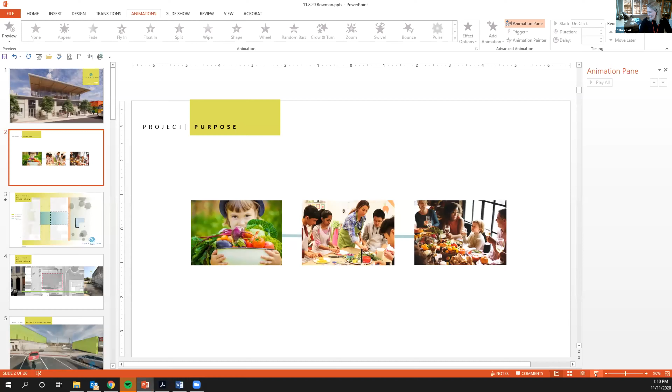Are you going to share your screen? Oh, I thought I was. That would be good, wouldn't it? Yeah, that would be good. Happens to the best of us. Can you see my screen now? Yeah, and if you could put it full screen, that would be good. There you go.

So I'll just start back at the screen. For my design, I wanted to create a space that not only had a large functioning teaching kitchen, but also a farm to table relationship, as well as a connection to family and community. Having a seat at the table - this is what we want for every child, to see themselves in a snapshot of home, love, and family centered around a table for them.

Taking a look at the existing site plan, we have our service circulation consisting of Missouri Street, which happens to be Alma's main arterial road. Next, our service circulation on Ohio Street acting as the alleyway, and pedestrian traffic from Missouri Street to the city pool and park. Cutting off that foot traffic would really be a detriment to Alma's downtown, so keeping a level of permeability between the three has always been important early on in the design process.

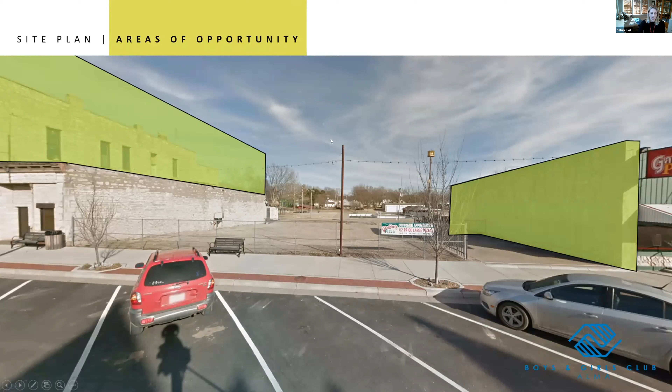Here's a visual connection between the alleyway and the adjoining pizzeria. During our site visit, I noticed some areas of opportunity. Thinking about the building's existing views, I chose to engage the nearby post office building's roof to provide views to the windows above, and then also to the Boys and Girls Club, also wanting to enhance that presence of the pizzeria wall.

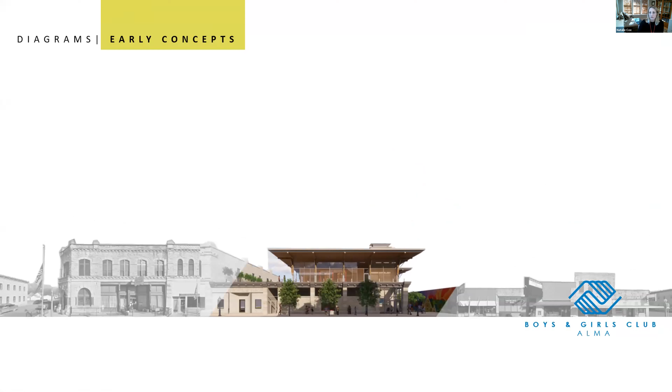Known as the city of native stone, I knew I needed to use limestone and stay within the historical context of the current building facades, considering Alma's downtown is a historical district registered with the Kansas Historical Society. A common theme were these beautiful, ornate, large metal and stone cornices, and I knew I wanted to implement that by taking that original profile and simplifying it into its most simplistic form.

So ideas of public versus private started to emerge, where the building could read like an Italian palazzo block, with public activity on the street level and more private activity on the higher stories. What started to emerge were these shifting planes that kind of pull away from each other.

Here's a look at the proposed site plan. As you can see, my building footprint occupies a vast majority of the available square feet up to the lot line. You can see how I engaged that nearby post office building with an outdoor patio.

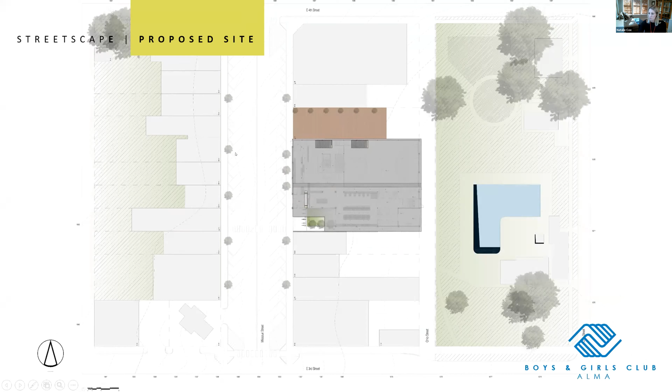Here's a diagram illustrating the connection to the park. There's a 7-foot grade change from Missouri Street to Ohio Street, which is connected by an ADA ramp.

By using the pizzeria wall, I was able to incorporate a community mural that acts as a mediator between the park, downtown, and the Boys and Girls Club.

Here is just a rendering of that street shot, and you can see that visual connection to the park and how the building opens up to the community.

The basic geometry of the building is this cornered entry, essentially repeated again on the second floor with a 10-foot setback.

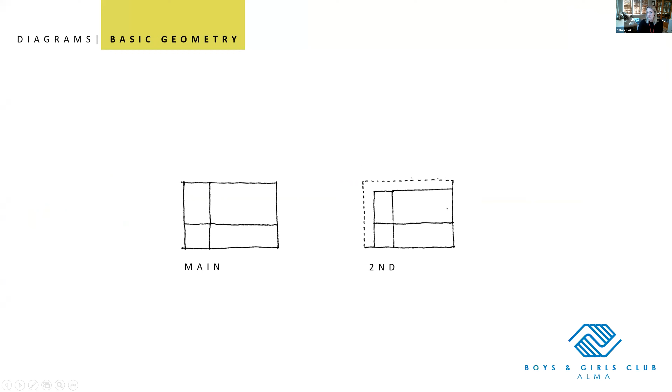My 5 systems are: structure, laid out in a grid pattern; territories, where red indicates administration, orange is the teaching kitchen and service, blue is the 6th through 12th grade members, and yellow is dedicated to our younger members K through 5th. Next we have circulation, which shows the main pathways leading to the exits of the building and carry you through those different territories.

Climate, a daylighting diagram that indicates where the most intense sunlight will be present in the building. Therefore, means of shade control and glazing were carefully planned.

Lastly, combining all 4 systems together to create enclosure, where the degrees of public versus semi-public start to reveal themselves. So on the main floor plan, upon entering, you're greeted by a secured reception area that allows you in.

Where children can hang up their personal belongings, and then a series of steps and seats that are incorporated into a ramp that lead you down to the recreational area, where you get your first glance of the dining room.

The dining room is centered at the most dynamic corner of the building. I chose to create the dining room as a double height space so that the chatter and the laughter and all the wonderful smells that the children make could carry up to the 2nd floor and invite people down.

And also the main interior circulation paths could lead you right to the dining area.

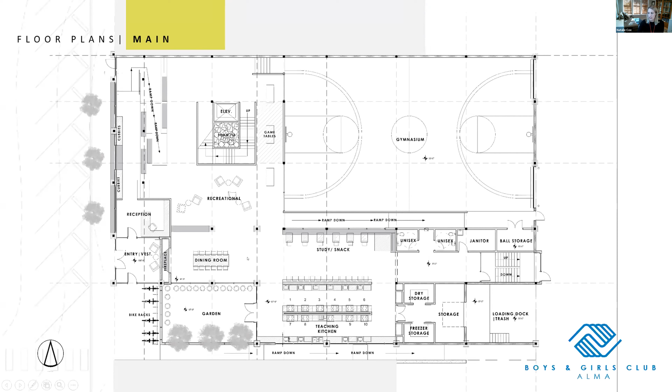Taking a look at the elevation change, the lowest elevation is a 7-foot grade change shown here. Next, we move up to a 4-foot increase, and lastly, a 3-foot increase back up to street level.

It was important for me to keep the garden, the kitchen, and the dining room all on one level so that gardening, cooking, learning, and bonding could happen without pause.

Moving upstairs, to help children with wayfinding I coordinated colors associated with activity. Red represents administration, yellow represents K through 5th grade areas, and blue represents 6th through 12th grade members.

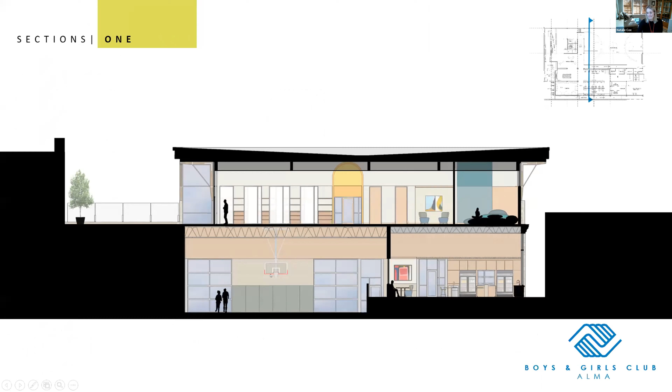Here's a section through the commons area above and the gym below with the kitchen. And here's a rendering of that gymnasium where these two girls are. This would be a pull-out stage on casters for performances.

Next we move to the transverse section, slightly inward into the foam pit, and you'll notice the double height space for the dining room and the fireplace, as well as a section through the open office and the elevator.

Here's a rendering of that dining space and reception. Because choice is important, especially for children who usually don't have that luxury, I made sure to offer different colored seating, which further drives that sense of my chair, my place, my home.

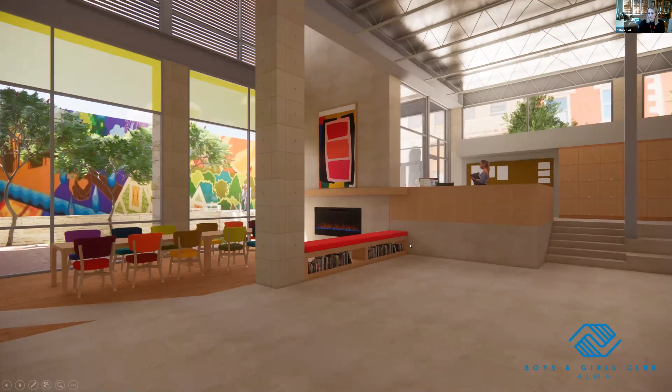Taking a look back in the opposite direction, because the staircase is located in a central location, I wanted to create an experience for the user. Also having that extra 4 feet below, I could use that to my advantage by doing something playful.

For safety precaution, I put a polished aluminum reflective surface on the bottom of the stairs for some of the smaller members if they got stuck and needed help, and it's also fun to look at yourself floating in foam.

And then here's a window seat. It's not only a place to put on your shoes, but also a sensory downtime, as well as views from the outside of the fun within.

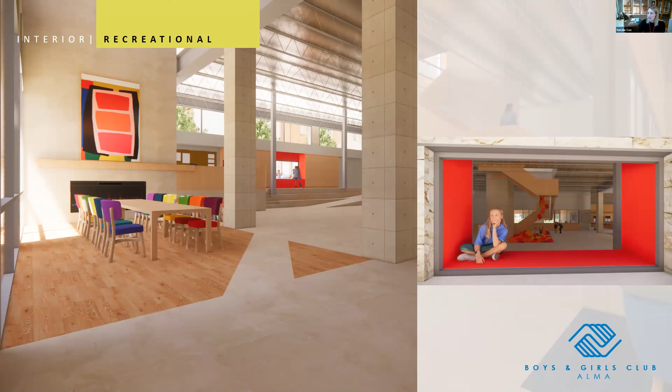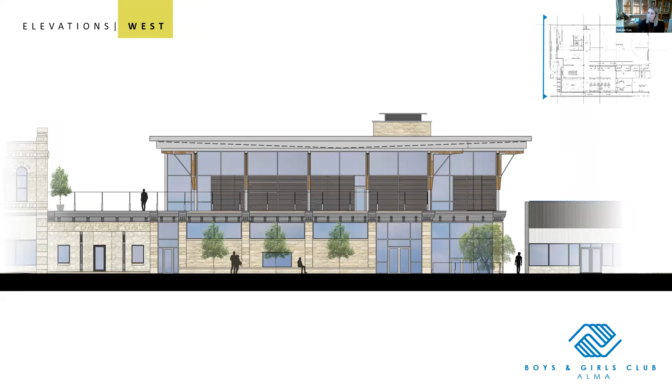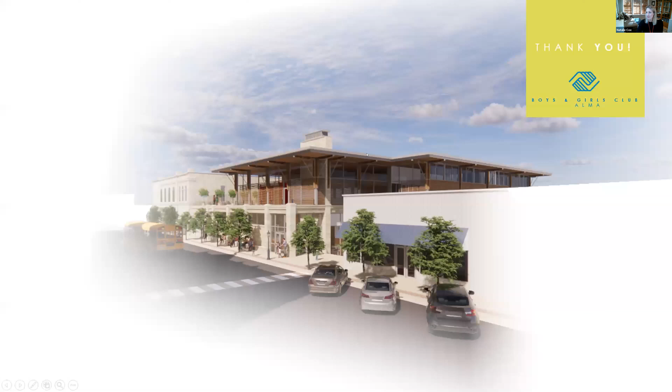Thanks for the presentation. Thank you. Very concise.

Nick, did you have anything to start? Yeah, just overall a few general comments. I was very impressed with the completeness of your project. It seems like everything you need to communicate your ideas and concepts is here. Also, just the way you branded it very successfully, I feel like I'm getting a presentation from an architect actually talking to the client. You've done a nice job having consistency to your aesthetics and graphics throughout the presentation. Great job there as well.

Yeah, I think there's a lot of successful things going on here. I appreciate your sensitivity to the context of the site, tying into limestone buildings on the main street, and then as you pull off the second level, starting to get more of a simplified, almost more contemporary feel to it.

One thing I think you could look at as you move forward with detailing is maybe not get so literal with some of the stone detailing on the first level. I liked your move with how you looked at the traditional cornice along Main Street and then found a way to simplify and modernize it. I think you could do the same thing at the main level and let the stone speak for itself as a material, emphasize that texture.

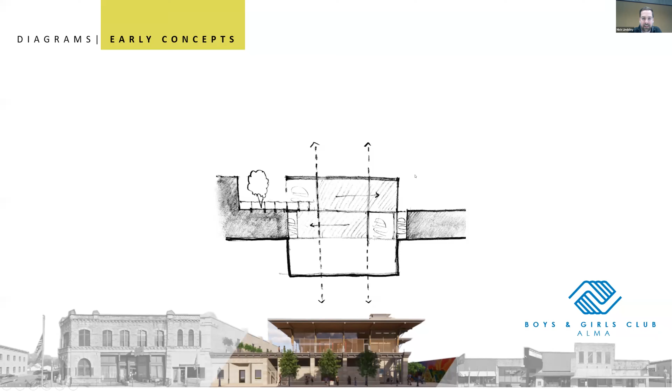I can't remember if you had a diagram of it. One diagram I'd like to see, and maybe you do and I'm just not remembering, is something that explains your approach to materiality and massing, showing that heavy monumental base and then the lacier top, in a very simplified partie diagram. I think that would help before you get into the really detailed images of your outcome.

Okay, yeah, that would have been good to do. But looking at the building, it's a very clear diagram of what you're trying to get at. I think as you tell your story, starting with that very simplified version before you dive in helps pull the listener along, depending on who they are, whether it's your client, a jury, or like this.

Thank you. I didn't put it together like Aaron did, but I was really drawn into the story. Then when we got to the gymnasium, I was a little... So when you're looking at your imagery to tell your story at the end, maybe lay it all out and see where the story or narrative doesn't quite come together. I think the gym looked like it was maybe thrown together a bit toward the end of the project and didn't have as much thought into it as the rest of the project. But overall, very impressive.

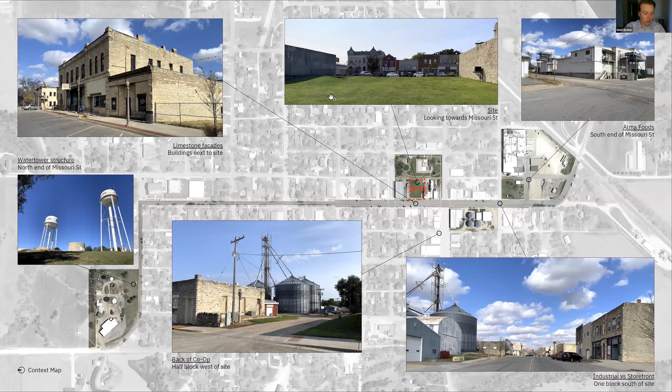Context also plays an important role in this design. The downtown strip of Missouri Street, highlighted in this diagram, primarily consists of retail storefronts with two major industrial buildings at the south end. I found these two buildings, the Alma Co-op and Alma Foods, interesting when juxtaposed to these storefronts.

The storefronts are stereotomic, while the industrial buildings, especially the co-op, are tectonic. The storefronts are human scaled, while the industrial buildings are machine scaled, and the storefronts fit tightly on their sites while the industrial buildings sprawl across and above theirs. The collision of these two volumes from the partie attempts to express this juxtaposition through materiality, structure, and form.

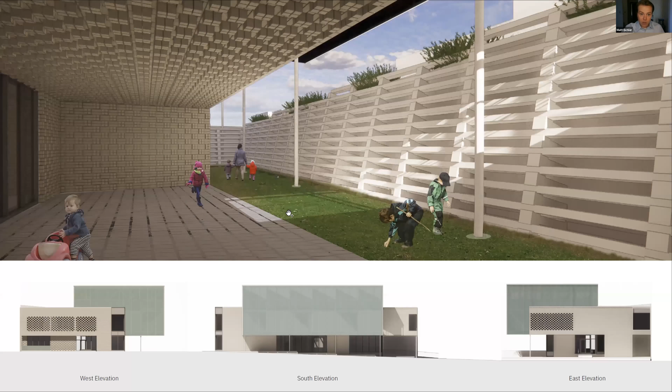So from the exterior brick to the tectonic structural bays of the translucent cube to the retaining wall of the sunken courtyard, modularity runs throughout this project.

There are 3 distinct brick patterns used to illustrate this while also attempting to defamiliarize people with this common material. The protruding header pattern is used whenever mass is taken away from the main stereotomic volume. The screen pattern, on the west and east elevation, is used to bring in some unique dynamic daylight while also distinguishing the entries from the rest of the building. And then a smooth brick pattern is used pretty much everywhere else.

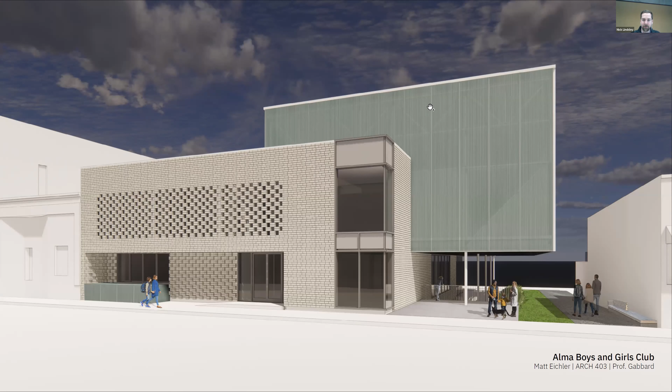Yeah, I agree with Tim. I really liked your contextual study looking at the agricultural industrial buildings versus those Main Street buildings, and how you tied that into the language of your 2 volumes. You described the massing as a colliding of 2 volumes, which I think is a great simple concept for a building. Being able to have that one sentence describe how you organized those 2 different ideas that you opened up with is the perfect way that someone immediately gets and understands what you're talking about, and then they see the building like, yeah, I see those two boxes colliding.

One thing that could make it stronger—I don't know if you have an axon view anywhere—there's a purity at the street level of those two boxes that holds pretty well, though as you go around the building, I wanted to see, and you can see it in plan if you go to your second level floor plan.

This level or the gym? The gym level, sorry.

So on the east side, you lose the purity of that lower level. I think there's some massaging you could do to rein in some of that program so it either aligns with that footprint perimeter of the lower brick buff colored volume, or make it align with the upper volume. Right now it seems like you're trying to fight it to make the space size required work, when I think you could do a little more massaging to clarify that idea all the way around the building, if that makes sense. Yeah, totally.

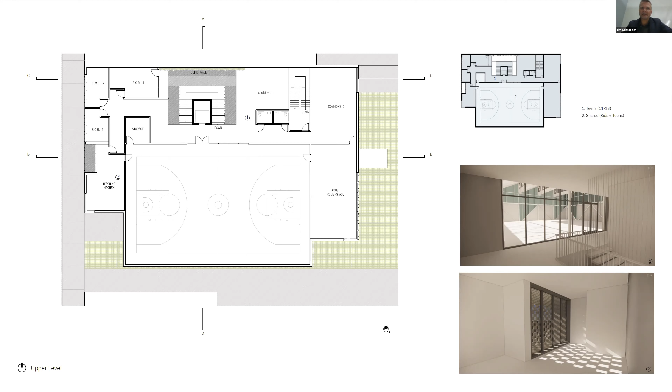Let's see, what else did I have here? I thought the way you organize the spaces to have observation of not only the front door but the back door on that first level, and translated the elevational change, was a really cool way to organize it. I agreed. I wanted to see you pull that reception back so there'd be a clear path all the way through, and the reception didn't get in the way.

Your main section, the one you were talking about where you were looking at the living wall, I think just as you talk about it and try to emphasize certain qualities of your drawings, I would look at trying to emphasize those points on the drawing itself, so we don't have to figure out what the most important parts of the drawings are. Just as simple as giving a green hue to the green wall, so we understand right away this is something special, and understand how this relates to the whole.

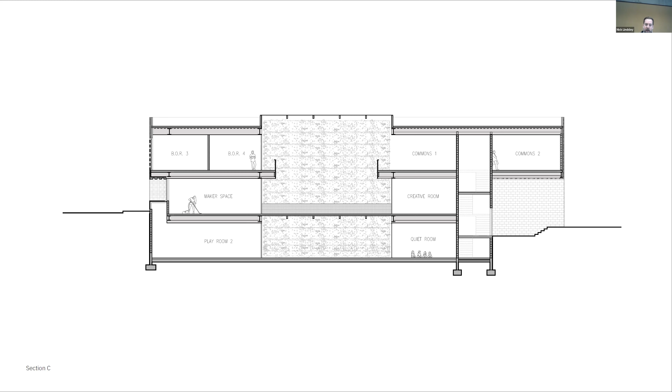The articulation of the brick, I really appreciated. I think you made the right move doing brick instead of limestone, because it feels like a more contemporary abstracted version of that randomness you get from stacked limestone. I'm curious, and maybe it was just because they created the right amount of texture you wanted, but I was curious about the different types of brick detailing you chose. Was there a reason for those specific details or coursing patterns?

Yeah, it started with a Flemish bond, but then I felt like the screen needed more light, so it kind of doubled up everything. And then there was this idea of using a single material in different ways to make kids, for example, curious about something they otherwise feel like they might understand.

Well, don't make them too curious, they'll try to start climbing the facade. When you go around underneath the building, I'm not saying it's impossible, but I question the doability of that detail, basically hanging the brick off the ceiling. That's going to be a pretty tough one to do. It's not impossible, but to get that done well I think is going to cost you more money than you probably want to spend on that detail, when you could put it elsewhere for more public spaces that are going to be experienced by more people.

The structure here, I think, probably is a little skinny, those columns holding up your gym mass. Now maybe most of that load is being taken by the trusses you have up top and pulled back to the main structure on the west side of the block. But I think you're probably going to want a little more beefy structure there, just for the sake of holding the building up.

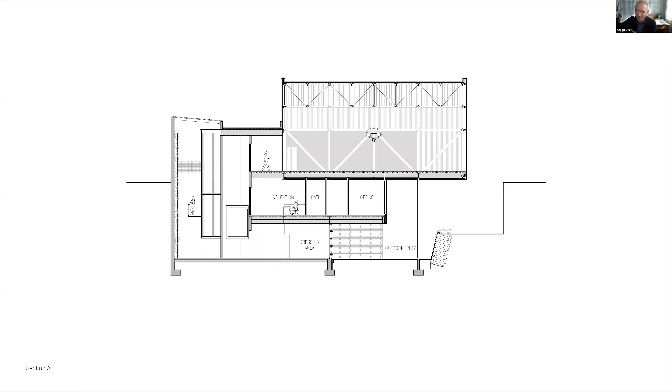I think spatially that's a good choice, to bring light that deep into your building, and trying to make usable space there is the right instinct. Spatially, I thought this move was really strong. And the move you made inside with the main stairway and the green wall behind it, that multi-story high atrium, was a nice spatial move too.

I liked how you hid the sawtooth of the skylights as well. Typically I'd say you want to show those off so people understand what your building's doing as they walk up to it, but it played well to your concept and helped simplify the massing to cover it up the way you did.

Looking at this in section, I was wondering how you were going to make drainage work at the base of each of the sawtooths as you covered them up, because without any sloping from the middle, you're going to have to do some internal drainage in that gym. But that's just a technical thing.

Out of curiosity, what was the thought behind the orientation you faced those sawtooths? They're facing west, so I thought the majority of the time kids at a Boys and Girls Club will be there after school, so it's capturing the light near the end of the day. Also it's the shorter span, so it was either east or west.

Going forward with that mass, I think there's an opportunity here for some night renders to show that. This thing is going to be a glowing box, a beacon for the downtown. I think that'd be an important image to show as you move this toward your portfolio.

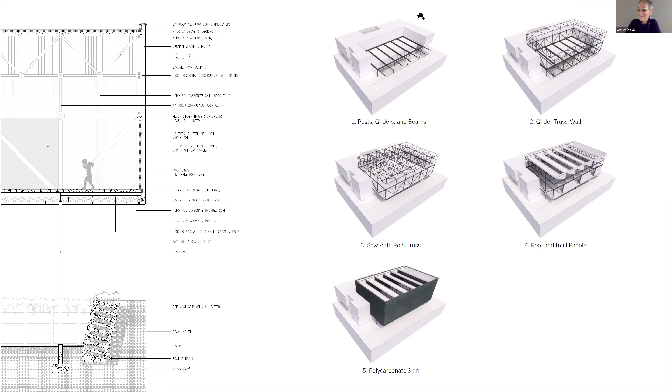Jo Beth, are you ready? Yes. All right.

Good afternoon, I am Jo Beth Hancock, representing Professor Jonathan Dessi-Olive's studio, and this is my proposal for the Boys and Girls Club of Alma, Kansas. The design process began with consideration for the site and its position in downtown Alma. The site plan shows the downtown and Main Street areas to the west, and a community park and pool to the east, where the Boys and Girls Club in the middle must provide a link between the two distinct areas.

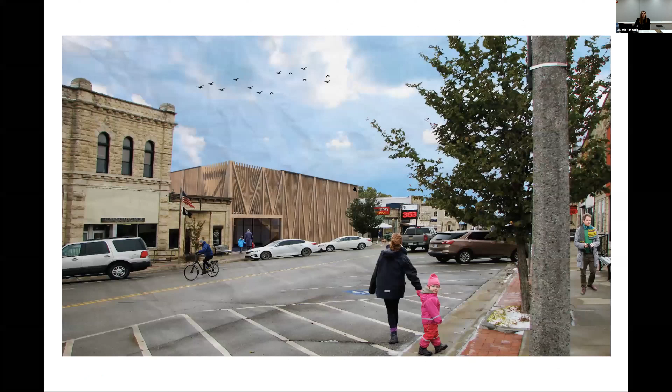A series of low-rise stone buildings lined the downtown street, and it was important to create a building that would mesh with the existing atmosphere while contributing something new and innovative. The west facade bridges the gap between the surrounding buildings by continuing the existing plane through a series of fins reminiscent of the swaying grasses of the Flint Hills, shifting upwards at the north end to indicate an entry.

The main floor of the club is divided into three main programmatic blocks: an area for children, an area for teens, and a shared gym space. A portion of the children's bar is carved back to create a recessed entry with space for bike racks.

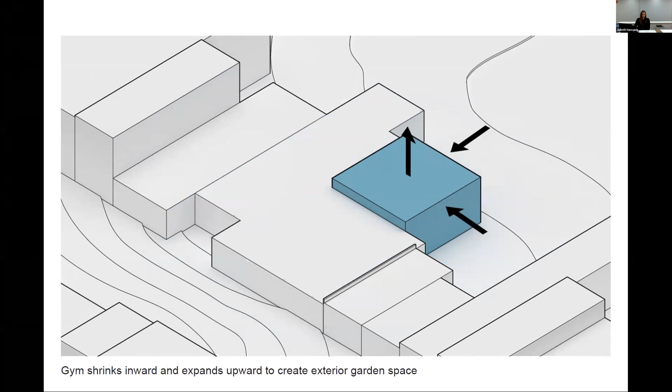On the east side of the building, the gym block expands upward and shrinks away from the edges of the site to allow for an exterior garden and play space. This area provides a secluded place for kids to study and play while maintaining strong connections to the club's interior and to the park across the street.

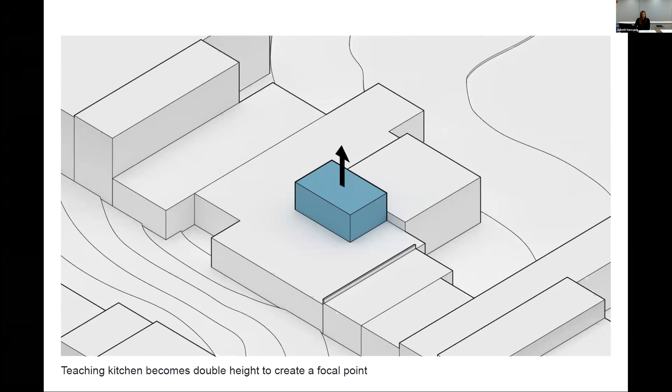Near the center of the building, the teaching kitchen expands to double height and becomes an important focal point in the building. The kitchen was a required element of the program, though I wanted to expand on it to create an environment with learning experiences centered around food.

Seen in the center here, the kitchen becomes a space where not only can children and teens learn about cooking and making healthy choices, but they can learn through the care of the garden outside and by using food as a means of exploring science, technology, engineering, and math.

Younger kids can participate in food-related crafts and simpler experiments such as making s'mores in a box with aluminum foil, while teens can engage in more difficult experiments like generating electricity with potatoes or creating soda rockets.

In plan, the kitchen has a direct connection to the teen lab and experiment space, as well as to the gym, with a more indirect connection to the children's bar on the north, always allowing food to remain a part of the experience at the Boys and Girls Club.

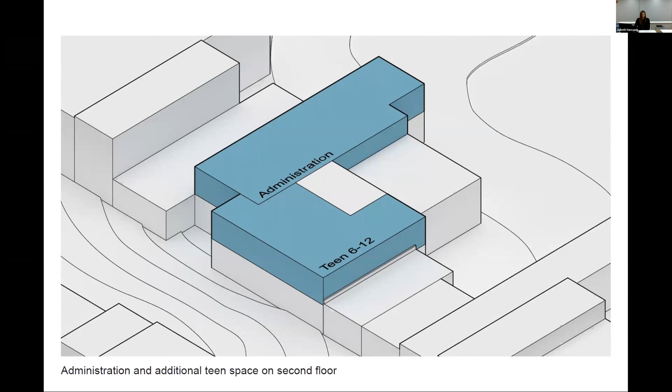On the second floor, there is additional teen space with an administrative wing above the children's spaces. A main staircase and elevator are located here near the entry with fire stairs in the corners of the building.

In plan, a teen lounge space with individual study rooms and the administrative office bar on the north create the second floor, all with views back to the kitchen in the center below.

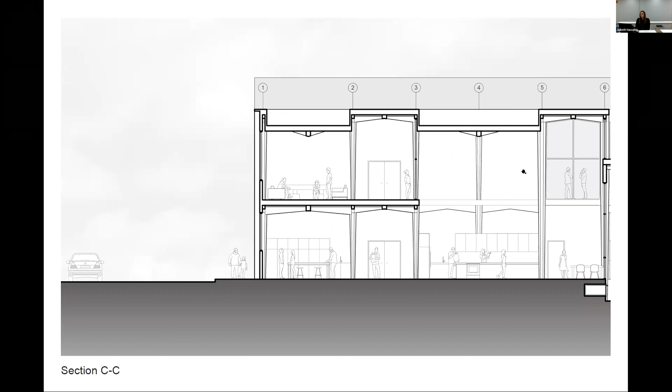Again in section, the kitchen is directly connected to the lab space here, as well as the teen lounge on the second floor where teens can overlook the kitchen from above. Similarly, the administration area also has a view down to the kitchen space.

The visual connection continues from the kitchen through the gym, which is sunk into a lower level of the site to address the slope, and out to the garden and park beyond.

Now, the building structural system is created through configurations of a branching column which emerged from my textile explorations at the beginning of the semester.

Professor Desi Olive's studio spent about a week and a half of a 3-week farmers market project generating and analyzing textiles, with consideration for the figures and configurations involved in pattern making and how these methods of creation and discovery can be translated into an architectural design.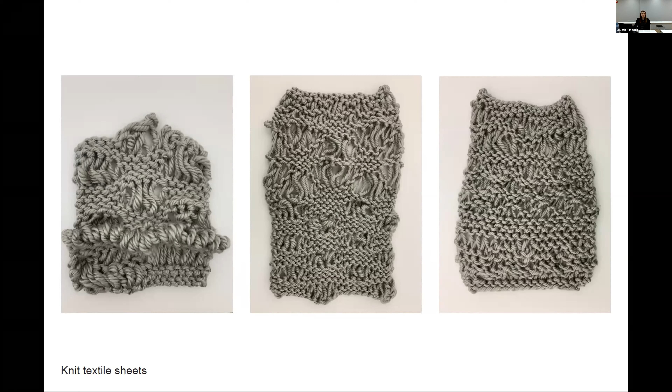I chose to explore textiles through knitting, which ultimately led me to discover an X figure and a semi-ellipse figure. I found that these figures can experience merging, accumulating, and swelling in a variety of ways.

The farmers market project required these figures and rules to be applied in new ways, and I used the rules to manipulate the X figure into a base geometry to organize the market stalls.

This organization led to the creation and placement of a branching column that fundamentally became a figure itself, which I have continued to analyze and develop in the Boys and Girls Club.

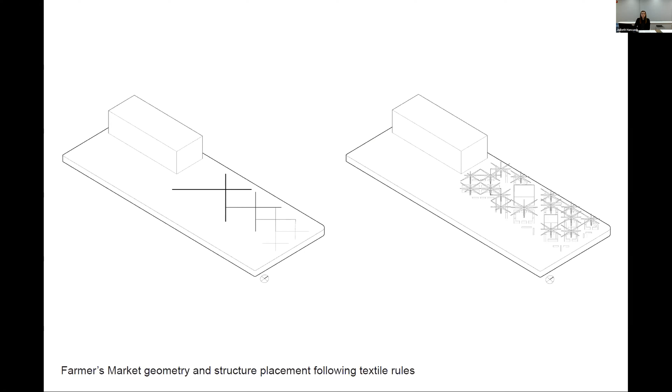Similar to the textile figures, a single branching column can be manipulated and configured in many ways. The branches of a single column can join with those around it to create a cube module. The elements in the module can be scaled and stretched to act more like a long span system and to indicate a hierarchy among the structural elements.

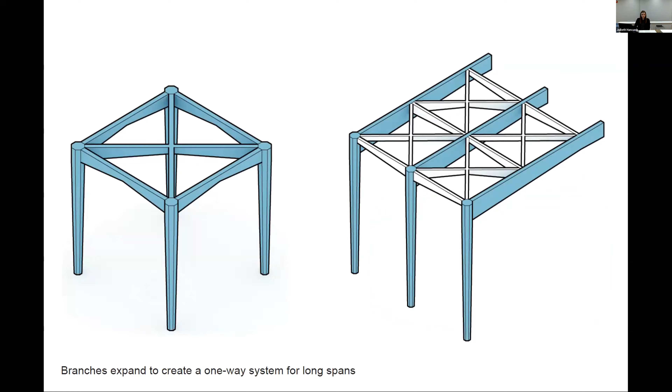The module and its variations can join together to create a structural system that allows for hierarchy and diversity among the spaces while providing an element of unity throughout the building.

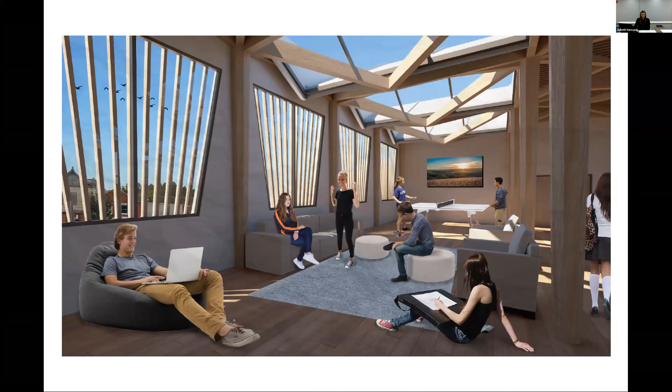Also, the diagonal branches of the module can be pushed down to allow for skylights. Here in the teen space on the second floor, the downward pointing branches create north-facing skylights that generate a pleasant, inviting environment for playing games, lounging, or studying. The skylights and the downward pointing branches can be seen clearly here in section, as well as they are used in several spaces throughout the building.

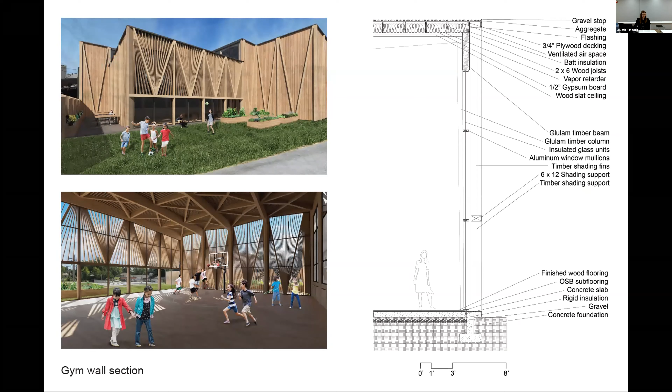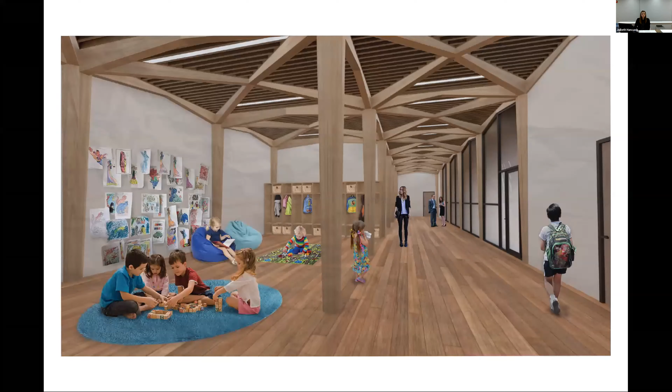Overall, the design of the Boys and Girls Club aims to create a variety of spaces with dynamic qualities that can be enjoyed by children, teens, and adults alike, where the connections to the adjacent park, the downtown streetscape, and the character of the Flint Hills allow the building to truly become a part of the Alma community. Thank you.

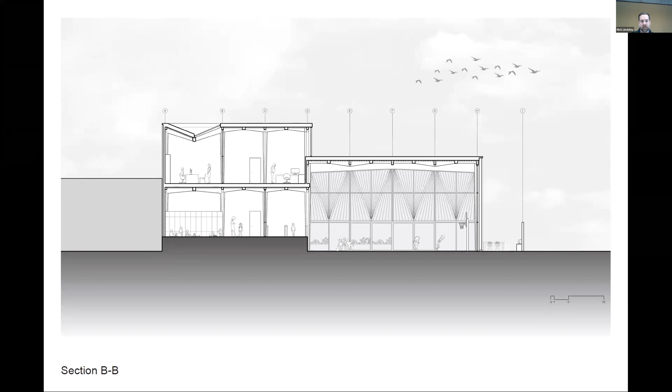You can see how you have a very unique custom structural system, but within your space it's very standard rectilinear, either cubbies or casework. I'd like to see if there's a way to integrate those a little more—customizing your casework to fit into those angled structural modules, or partitioning some areas off in a way that makes everything feel cohesive. In the kitchen areas, you can see the casework just kind of hanging out in the middle with the upper cabinets. Look at what happens when those two things interface—the structure and your built-ins.

On the west side—when everything else is so unique, it's a matter of how far you take that. Does everything become unique? So you set yourself up for a challenge there. But you only have a semester to do this, so you can't get everything.

On your west side, I was wondering if it'd be possible to get more views into the building at the street level. You're fairly closed off—maybe it's just the render, because I know you showed interior views looking through those blades of grass, piece of wood, where you can see out just fine. But walking by on the exterior, it feels fairly solid at street level, and I'd encourage you to find ways to manipulate that to make the building feel more welcoming at that pedestrian level.

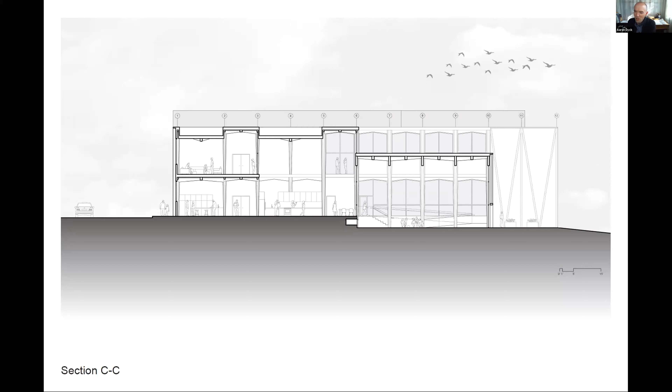Am I right that you had an idea that there could be big doors that open? Yes, that's correct. And I find that to be a really compelling idea too. The Kansas climate doesn't invite that very often, but I think that could be a pretty cool interactive space if there are nice times when those doors can be open.

It makes me wonder if this exterior space wants to be paved instead of grass, so that there could be complementary use—you could just take your game right outside or something, or maybe it wants to be grass. I don't know, but the idea of having some gardens out there is pretty compelling as well. It's kind of that spatial extension idea—what happens inside and how does it relate outside?

Yeah, it might just be part of the rendering technique there. The grass seems to have a really deep texture to it, or something that makes it look less usable than maybe it would be. Oh sure, so like a manicured lawn would be—yeah, I see what you're saying.

I agree with Aaron, what you were saying about how you oriented the gym, and I like that it creates a connection to that kind of extension of the recreational corridor between the gym and the pool. I think that you could have some nice interplay there between activities.

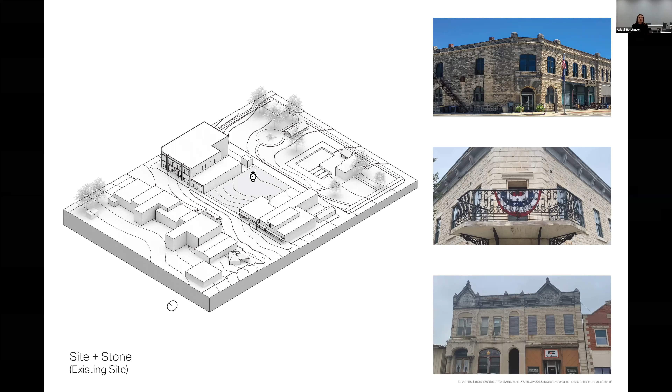The existing site has a slope of 6 feet from the west to the east, which has been made into a sort of plinth from which we will carve our most cherished space. Just like Zumthor's pool space, in this design, the multi-use space is embedded into the site, bringing the street to the park in the rear. The multi-use space becomes subtly defined by the base plane change, and from here, the masses can be composed.

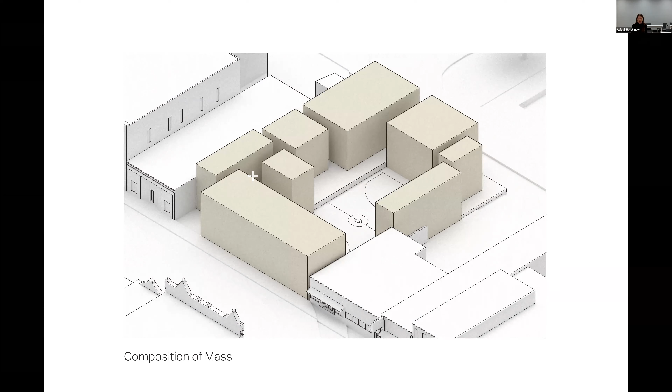I then created a composition of mass objects that share proportion to the site and organized them into clusters according to their program. The cluster diagram of Vals in this project allows for flexibility, and moving around the mass means discovery while still keeping order and security.

The following diagram shows the composition of the Therme Vals and the Alma Boys and Girls Club side by side. The composition shows a sort of spatial intimacy that comes with circulating between the masses, and how both the semi-private and private spaces begin to define the edges of the most cherished space in the center.

The next move in this design is to carve each mass so that each one has its own moment of light in regard to its function. Each one is to have its own spatial quality and diversity of experience, making it special. A unifying roof is inserted to unite the mass and create a singular building.

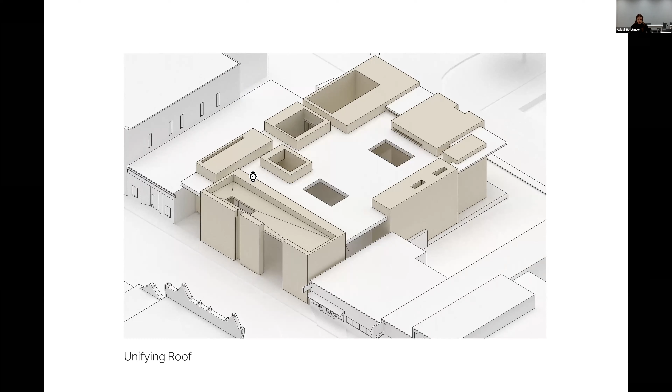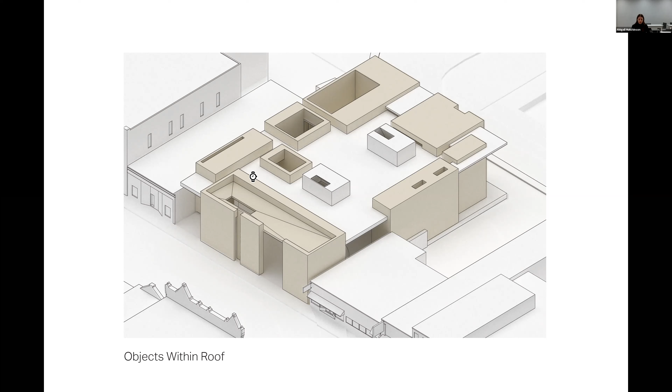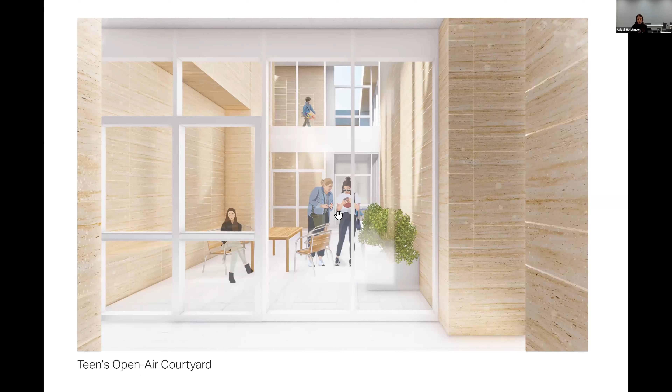You can make discoveries about them at their entries. Each one is unique, and some are even open to the sky above. The spaces inside of each mass feel intimate and controlled, and each age group gets a special experience with the outside while still being safe within the building.

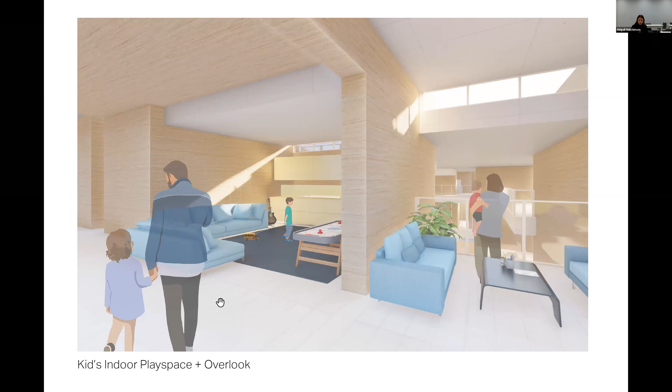The cluster diagram allows for more intentional spaces that act as sort of pods able to control their circle of influence. These intentional spaces allow staff and members to focus on tasks that are fundamentally within their control. So the capacity to be proactive is increased with more focused and intimate space.

The second floor contains a hybrid of creative and administrative space. Boys and Girls Clubs across the nation are striving to meet the needs of their children, and their mission revolves around this idea of greatness, where kids are able to be the best versions of themselves.

Wabaunsee County has a demand for emotional and health support assistance for children in the age groups typically served in a Boys and Girls Club. They actually have about 5 times the national average for suicide, likely due to cyberbullying.

So for many kids, this idea of greatness cannot be achieved because of boundaries created by mental illness or distress. Previous traumas, without the knowledge of healthy coping skills, can have a serious impact on the well-being of the child, especially if they're faced with dealing with it on their own.

So this design proposes an additional block of program within the creative space in which mental health professionals can hold confidential sessions when needed, and art therapy professionals can use the process of self-expression to help kids understand their emotional conflicts. In a rural town like Alma, Kansas, a resource like this is very valuable and can provide a needed service for little to no cost at all.

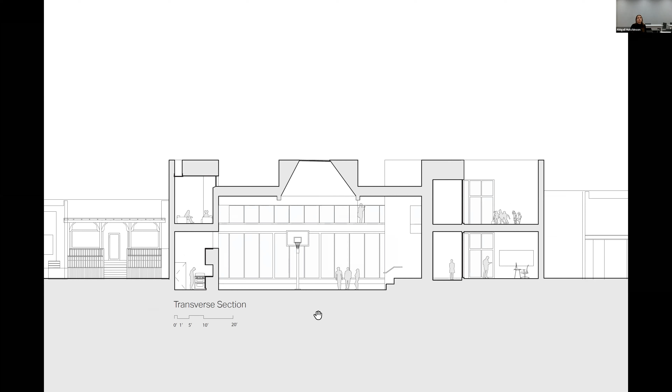A cut through the short length of the building also shows the spatial individuality, with the kitchen mass here and the seating area above. And then the teen study resource space and the kids outdoor play area. And between them again is the multi-use space with that object of light directly above. Moments taking place in these spaces are able to be intentional and, just like their spatial qualities, unique.

So overall, this design uses mass, program, materiality, and light to create spaces with intimate and controlled moments. It becomes a place of solidity and quite literally a rock in which kids can lean on. The solidity of its form pays homage to the history of limestone in Alma, and its spaces allow for moments of focus where each child's needs can be met. Thank you.

Thank you. Nick, you want to go? Sure. Yeah, I think this is a really nice project.

I'm gonna gravitate towards any project that starts using the Peter Zumthor bathhouse as a precedent. I think it's one of the best buildings in the world, and if you ever get a chance to go there, I highly recommend it. You'll remember it for the rest of your life.

But I thought you were really successful—one thing that's hard, I think, as a student, and even as you get into the profession, is taking a precedent and translating it into an idea that worked with your project. I think you've done that very successfully here. One thing I appreciated is the relationship between your solid volumes and the translucent spaces. You didn't lose the fact that you needed to create some sort of relief between those different material expressions to let that idea play through, and I thought that worked really well in your renders.

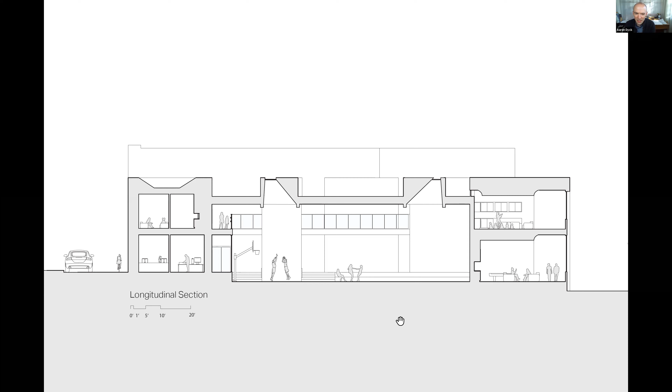You totally took that precedent. It shows through the project, and I thought you were really thoughtful about how the masses play with each other, how light works with the masses. So you were a quick study. Good job on that. Your graphics are beautiful too. There's a nice softness and lightness to the building, even though the concept's so heavy. I really appreciated that kind of post-digital style that you use. It worked out really well for you.

Earlier we were talking about this gym and sound isolation. That is a head scratcher. I actually think I like what you've done with the gym so much that maybe it's not how we traditionally think about a gym, where there's a loud game happening and then you want quiet. Maybe that's not the case. Maybe it really is a multi-purpose space, and if something's happening in there, then everyone's engaged in it. And if that's the case, I don't know that acoustic isolation would be quite as big a deal.

I guess what I'm trying to say is you kind of sold me on the idea that this is more than just a gym. It's a space where it's just the central activity space.

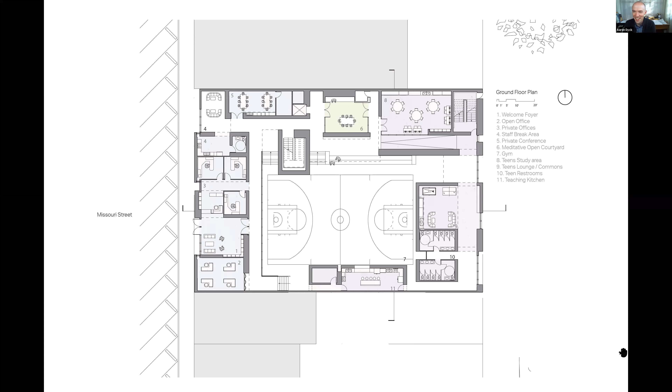I mean, I'd get excited about going here if I was a kid. And just like right here in this plan, you took the opportunity to take those 4 feet of elevation change and create just 2 tiers of seating. Just a little move like that, that's great. And your ramping that you have in there for accessibility, sometimes that stuff can feel tacked on, and this feels nicely integrated. It doesn't seem like an afterthought. So good job getting that integrated up front.

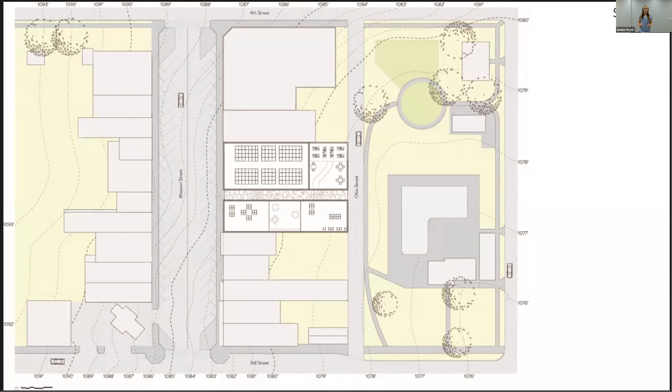In order to create a piece of architecture that is an addition to a community, I needed to understand how the spaces the program called for would impact this community. I broke down the program into 4 spatial categories, inserted the program, related it back to the goals of the Boys and Girls Club, and finally related it to the impact it would have in Alma.

This analysis emerged from asking the question of how to make the Boys and Girls Club of Alma truly of Alma. What spaces drove the mission? What architectural spaces and ideas drove the mission? How do I make the community of Alma stronger with one building, with one program, with one mission?

The form developed from there, reacting to the needs and constraints of the site. Uniquely, because of the building situation between 2 party walls, light could only enter the building from the east, west, and above directions, which became a significant driver in the form of the building. The site also has a slope, which was negotiated through a series of architectural elements, such as amphitheaters, to create unique spaces that only this site could offer.

Aligning with my intention of not disrupting the community, I simplistically designed the entry, which provided a modern feel and continuation of the urban edge. The final form offers a central opening that navigates past the masses of the program, which I chose to celebrate.

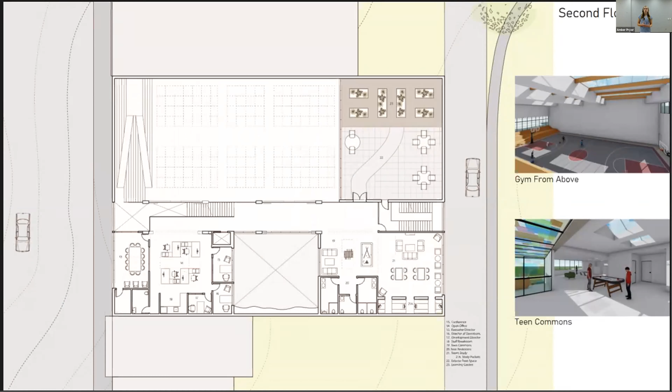In the ground floor plan, you can clearly see the split that I've introduced and how it allows members to view each other. On the right, you can see into the teaching kitchen and into the exterior play courtyard. Up the stairs is where the teen spaces and the administration offices exist. On the right, you can see into the gym from that central walkway, allowing members to see what others are doing and learn from them.

Here's a rendering of the gym space where you can see the use of color and light to celebrate the circulation split.

Thank you. Amber, do you have—maybe I missed it—but the patterning on the circulation split, the fenestration there, the patchwork, was there a basis of how you came up with that?

Yeah, so when I was first diagramming how I wanted to display the spaces, how I wanted them to be organized, I proportioned them with a series of squares and overlapped them to show how the spaces would interlock.

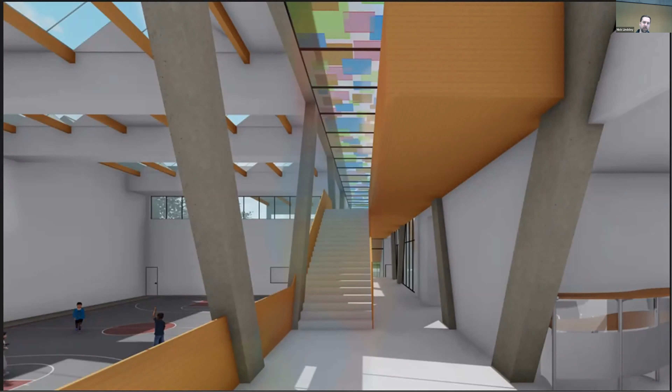Nick, you got anything? Yeah, can you go back to your massing diagrams that you had up at the front? I thought the way you opened with these—maybe I'm biased because I just love diagrams like this—but I thought there was a really strong clarity to the project. Before you even got to the floor plans, you kind of already understood what you're going to be looking at, and when the floor plans came up, they just made sense instantly. I thought these were really, really successful.

One thing—you did some amazing research with the demographics, and then tying that same graphic style into your understanding of the program and how it related to the mission of the organization. I think it'd be great if you could tie that same level of graphic quality and color branding into your graphics here, taking it one step further to show us how you've zoned the masses, so before we even see the floor plan, we understand how you've organized the building with those different uses. Does that make sense? Yeah. Because these are great diagrams, very simple, and they tell us a lot. I think if you give us that one extra bit of the story here, then when we get into the floor plans, it becomes immediately clear where everything is and how it's all working together.

So if you go to your floor plan—yeah, I thought this was the organization of the building. Again, there's a very strong clarity for how you circulate, no question about it. You have your main street through the building that separates the major functions, and what I liked is you can be anywhere along that and always feel connected to any part of the building at any point. There's a nice relationship to everything off the circulation core—you don't feel buried or have to go searching for some space elsewhere.

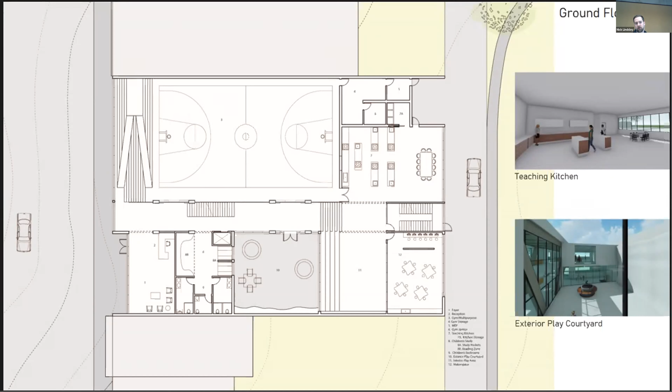Thank you. In how you organized the massing, what made you choose which programs would go on which side of the space? Did everything kind of lay out because of the size of the gym, and it's got to be a certain size, or how did you choose the relationships between how different program spaces laid out?

That's how it started. When I put the gym down, I started zoning the spaces - I need to put all of these on this side and all of these other spaces on this side. It kind of just fell into place, dividing into the 3 pillars of youth development. And being able to apply that further made that concept stronger. Cool.

And then how about your structural approach to those - I don't want to call it a massive truss, but your angled columns there through the middle. What made you choose that structural system? I was looking at a precedent and really liked how expressive it was. And since that's my most important expressive space, I knew I needed something a little more expressive than just straight columns, so I went with an abstracted truss.

I appreciate your elevations on Main Street showing - we didn't just see the close up of the building, we saw the entire context of Main Street, so we understood how those buildings related to the surroundings, which is great. Not only do the size of the buildings relate well, but I think the articulation you put into each of the different masses relates well to the proportions of other buildings on Main Street. I don't know if that was intentional, but it seems to work fairly well. So good work.

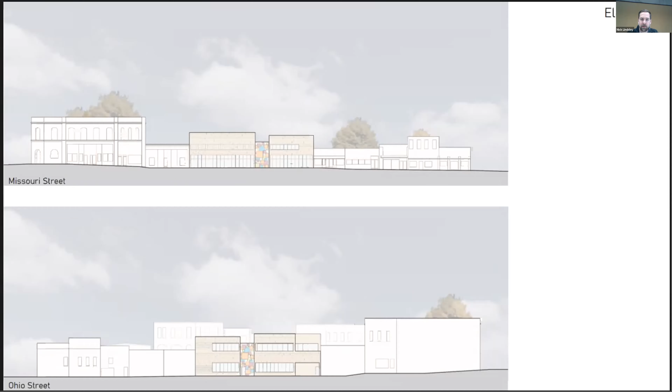And all the study you did up front of the demographics, can you talk a little more in detail of how that informed your design decisions? I thought the work you did there was great. I don't know if that was a requirement for the project, but it definitely was a great way to open and tell the story of who might be using this space and your understanding of who you're serving. I thought that was really nice job there.

Yeah, I'm actually minoring in nonprofit leadership studies, so a lot of this research came from what I know about nonprofits and what I know about nonprofits entering communities. I knew that I needed to thoroughly understand what a community is in order to build a building that fit into that community. So that's where a lot of that came from. Cool.

I like the way you used the graphics. It wasn't just like an Excel graph, it was very engaging as well. I wanted to understand what it was talking about. Unlike presentations from people sometimes about finances and things, and it's just bars, and it's like okay, next slide - but this was good. Thank you.

And sorry, not to take up more time, but I also liked you addressing the mission of the organization and really using that to drive your narrative that you use to tell the story about your project. Especially from a client standpoint, that's something that they will latch on to. The more you can relate back to their needs, who they are, what they appreciate, what their concerns are, as you are talking about the work you're doing for them, the more successful your argument for certain things is going to be, and the more successful the project will be too. And I think you nailed that.

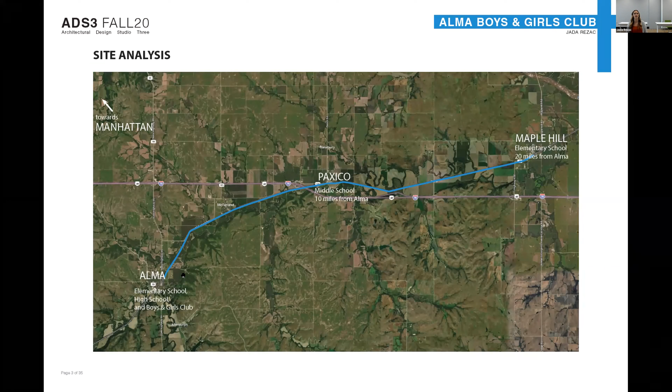Alma is located in the Flint Hills. This Boys and Girls Club would be home to the kids in the elementary school and high school in Alma, and also the kids from the middle school in Paxico and the elementary school in Maple Hill, about 20 miles away. Alma is about 30 miles southeast of Manhattan.

Based on that, the main entry for the kids would be off Ohio Street from that bus stop. There's also a 6.5 foot slope on the site going down toward Ohio Street. The lighting on the site is fairly bright in the morning and afternoon, and the surrounding buildings provide nice shade to the site in the evening.

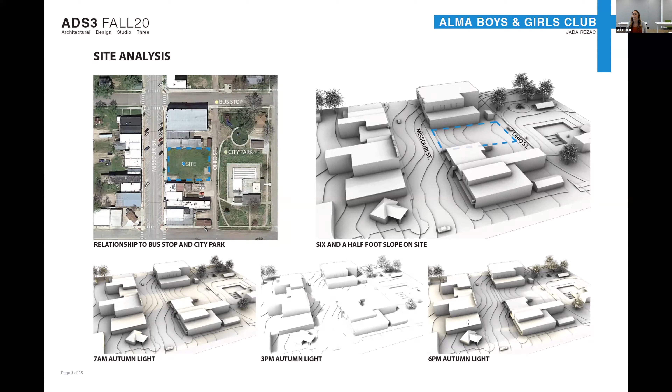When thinking about what a Boys and Girls Club for the city of Alma should be, these conceptual ideas came to mind: the interlocking of their skills, talents and experiences all coming together, and the ability to focus on themselves while still engaging with other groups of people.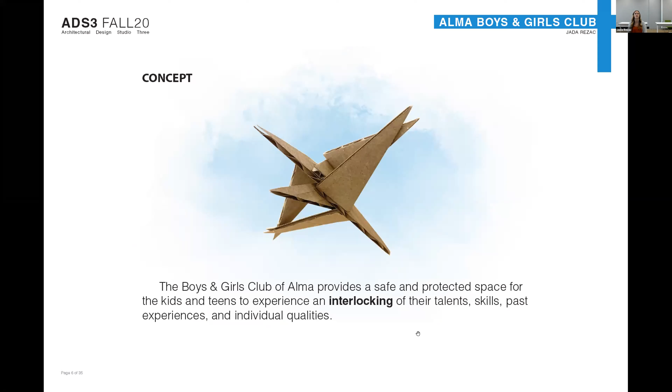It should also feel safe and protected, but still connected to the outside world, with the idea of leaving something heavy behind and entering something light, that feeling of relief and setting down those burdens. Combining all of those, the main concept is the Boys and Girls Club being a safe and protected space for kids to experience the interlocking of their talents, skills, and qualities.

Taking that idea of interlocking, this was part of my process of finding a form to embody that. I ultimately decided on this form, best for the program as well as the concept of interlocking, and was able to make study model iterations.

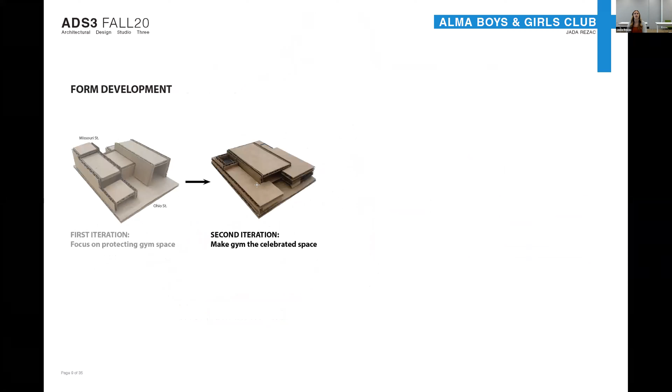My first iteration focused on protecting the gym space in the middle. Then I focused on celebrating the gym space while still protecting it. In my third iteration, the orientation of the gym was rotated to further emphasize the interlocking happening.

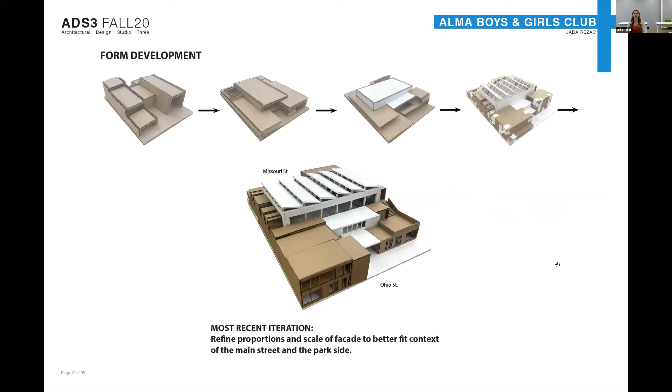Then I was able to add details. In my most recent study model iteration, I refined the proportions and scaling to better fit the context of Alma. Taking that program, the teens and children were placed into two separate program bars.

The gym was placed in the middle to interlock and connect the program bars. Those program bars shifted to protect, based on their program, and adapted to the site topography, determining the volumetric qualities.

The entry thresholds were placed in the middle into that celebrated gym space. Finally, the exterior spaces were carved.

The 4 most important aspects of kids' and teens' lives are studying, playing, socializing, and being creative. All 4 of those aspects share a commonality and an ultimate interlocking at the gym space, which is the celebrated space.

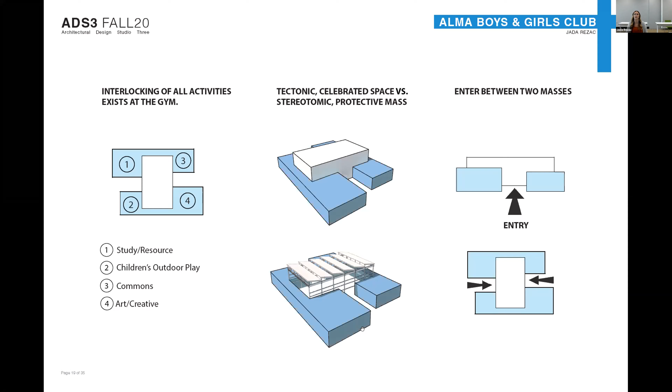It has a very tectonic expressed structure while being protected by two stereotomic masses that hug, cradle, and hold it. You're able to enter between the two masses.

Coming from Ohio Street, this is the street that kids and teens would enter from, so the side of the building is really activated for the pedestrian experience. This park to the east has the landscape pulled in while the building is pushed back.

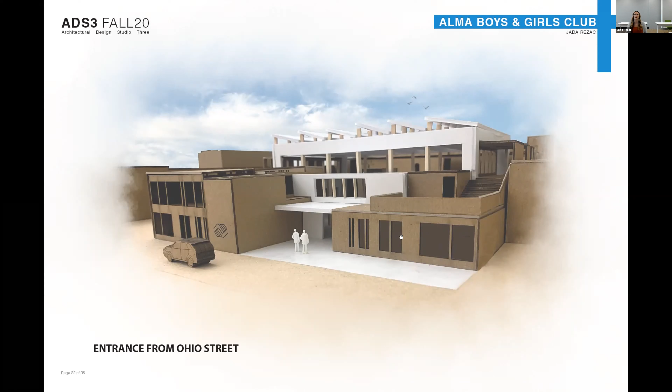Programmatically, the teens are in the northernmost bar and the children are in the southernmost bar, and they ultimately interlock at that gym space. The administration exists in the middle and on the upper level as well.

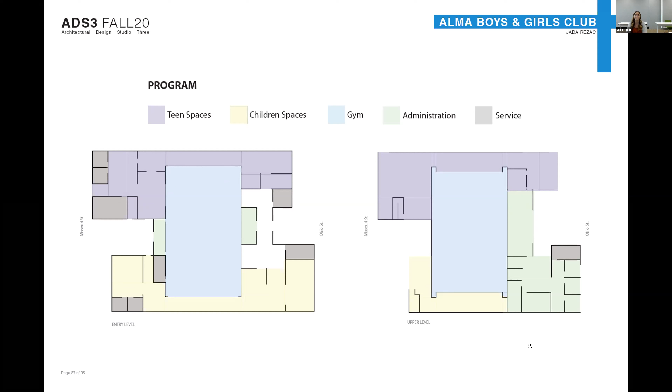Looking at the entry-level floor plan, the kids and teens would come down Ohio Street, and this park is pulled into the landscape with this green softscape that aligns with the glazing on the facade. Then you enter in between these two heavy masses, so you immediately feel protected as you enter. When you step into the foyer, there's this glazed wall, so you have this immediate visual connection into the celebrated space.

If you're a teen, you would move up to the north, and if you're a child, you would come down to the south.

But either way, the first space you enter are these cubby areas, so you're allowed to immediately set down your burdens and what you're carrying. Some of these kids have come on a bus ride from up to 20 miles away, so allowing them to set down and relieve themselves of what they're carrying—not only physically, but also mentally and emotionally—allows them to feel that relief when they step into the building.

Also, this circulation that occurs on the side of the gym has glazed walls to look in and have that visual connection into the celebrated space, creating a place of pause and rest.

Also, the glazing along the facades speaks the same language, but in areas of more focus, it's inverse. So it's the same light pattern coming through, but inverse, to allow for more focus and fewer distractions in areas that need to be a little quieter.

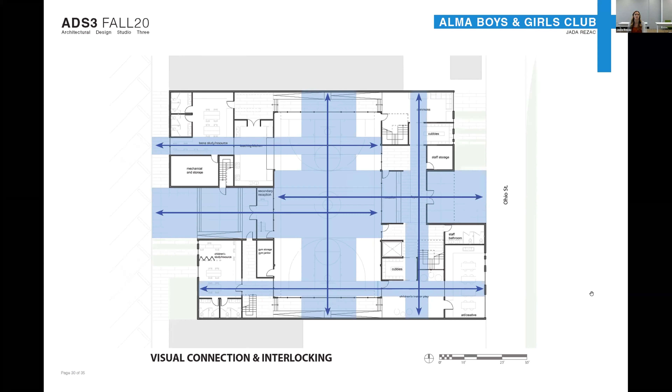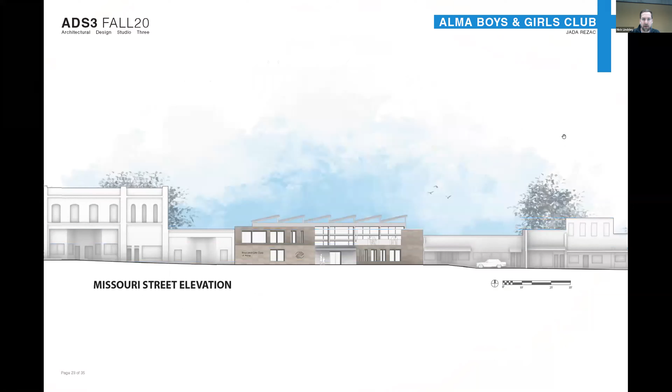Your massing, if you want to go back to your massing images, as you started to model through those. Yeah, I thought this was a great way to sort of show how you walked us through your decision-making process.

After number 3, I started getting a little queasy, but not in a bad way. Maybe because I'm just more of a simple form type of person, but I saw number 3 and I was like, oh man, that's a really clear, simple diagram. I love where that's going. And then you started to dissolve the shapes, and I wasn't sure where it was going until we got to the plans, and then it started making sense.

Maybe from a diagrammatic standpoint, we don't need to see 4, 5, and 6 until we get into the plans. I think just showing your main concept was about interconnecting two separate ideas, and then also giving that safety to that celebrated main space. I think that's all you need to show when you're talking about concept.

How the form develops from there can respond to what you do in plan that we see later. That's not the case for every project, but I think for yours it works better to see how you start to relate specific spaces to the form later on.

Yeah, that's all in the art of storytelling. The length, no different than how long you make a sentence. How long should this sentence have been? Maybe you could have cut a few words out of it on this page or this image. But the work you put into the physical modeling to show these same ideas, I thought was also very compelling. It shows you don't always need a finished render to get across a compelling idea about how a space feels. You can sometimes get it just by using some cardboard and getting the forms modeled up. So I appreciated that a lot.

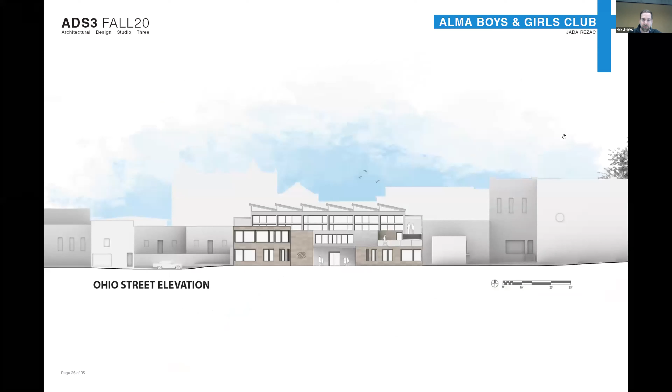Do you want to go into your floor plans real quick? Level 1 maybe. Oh, sorry, before I get to that, I loved on your elevations, your street elevations, really taking those contextual lines, the facade, seriously, and showing us how they informed your building. That was a nice touch. I think I've seen Nick do a diagram just like that before.

On your floor plans, I would like to see a few more options to get from one side of the building to the other, from west to east. You show the visual connectivity and all the different ways you can see through the building, but it doesn't necessarily translate to physical circulation. Right now, especially as you talk about public and private circulation, it looked like the only public way to get across the building was directly through the gym, and maybe that's not the case. Maybe the diagram just needs that color pulled a little further south, so that corridor on the south side we see here with the ramp is included in that public circulation. Right now the visual and physical circulation doesn't seem to jive super well, and I think it would be a little stronger if we got a sense you could move freely through the space without having to engage in maybe an event going on in the middle of the building.

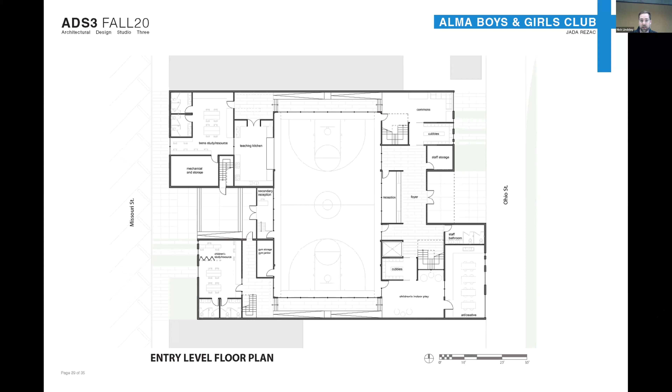I thought your renders were really successful as well. If you want to flip to those, they did a good job showing the life in the building. The light quality is really nice, there's a warmth to them. It just seems like a place that would be fun to be in and spend your afternoon and evening in.

I like that you showed the map at the very beginning, because when you get to the interior experience, you see that some of these kids from junior high are coming 20 miles just to be here. So they're going to be spending likely a few hours here, and more than that away from home, just to experience the space. Knowing that makes it even stronger to see the effort you put into making this a welcoming and comfortable space.